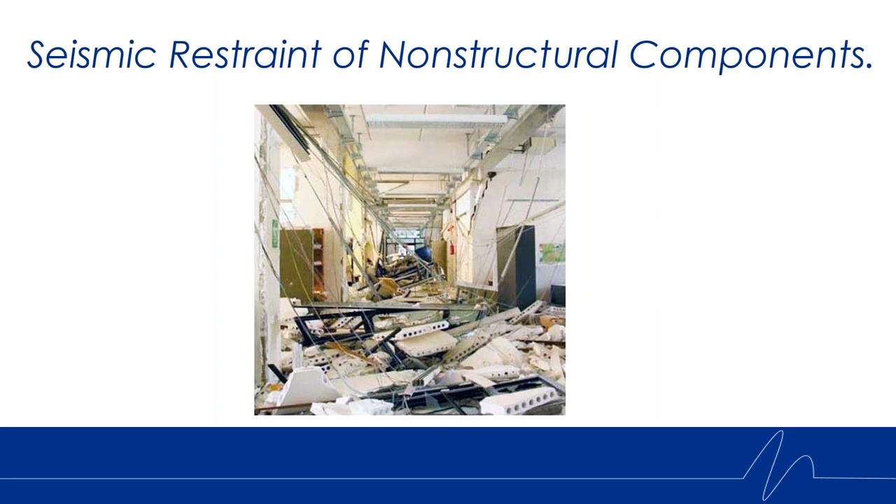So let's talk a little bit today about V.LOCK. V.LOCK is a seismic restraint component that we're going to be offering here at Kinetics Noise Control, and this is in the realm of seismic restraint for non-structural components. Here at Kinetics, our staple of products for seismic restraint have always been led by the Quake Lock. The Quake Lock shown here in the picture is our current seismic restraint device that comes with the cable kits that we currently offer here at Kinetics.

And the Quake Lock is a fantastic product that does as intended. However, the installation of the Quake Lock itself in the field can be sometimes a little lengthy and a little challenging. So in order to properly install a Quake Lock device, you do have to feed the cable through it twice, and then each one of the little adjustment screws does have to be torqued down to a certain torque setting using a torque wrench. So as you can imagine, when you have a long run of pipe or duct, you have a lot of seismic restraints within that run. There's an awful lot of these devices that have to be tightened up.

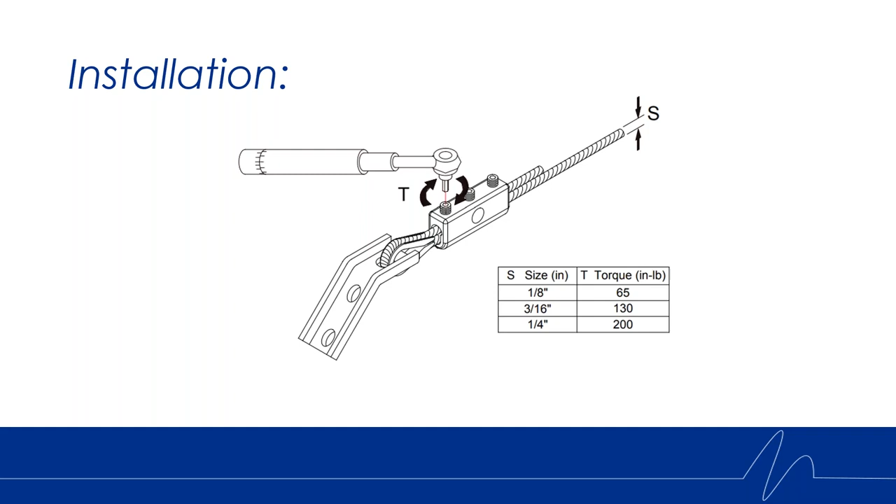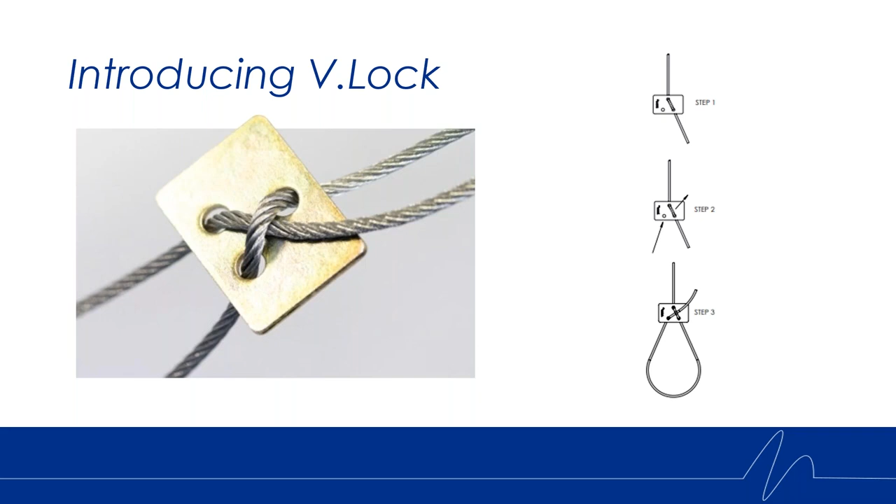So with that in mind, Kinetics is coming out with a product called V.LOCK. The V.LOCK product is essentially a seismic restraint plate that takes 3 extremely easy steps to tighten. So unlike cranking down the adjustment bolts for the Quake Lock, the V.LOCK, as you can see from the rendering, the diagram here, you just feed the cable through the 2 holes around whatever you're attaching it to, and then under the cable again. So that's how the V.LOCK system works, and as you can tell, installation is done in much less time, saving field labor for the contractor.

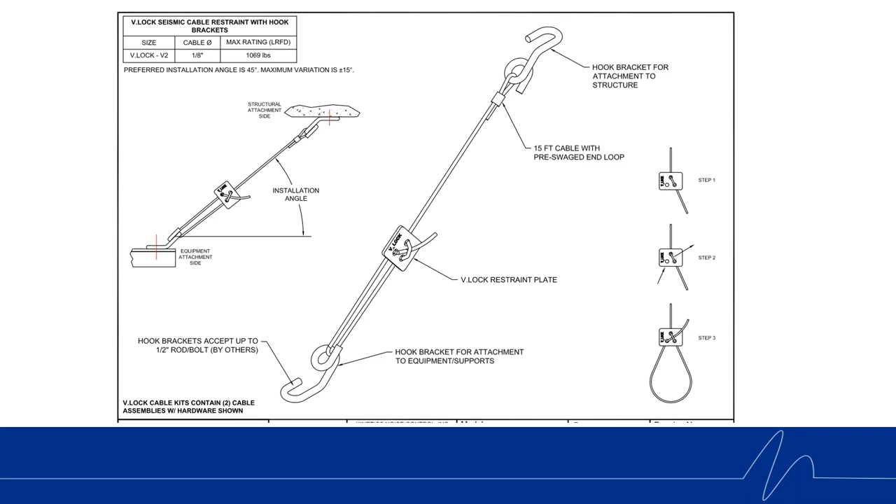So here's a look at our 1/8-inch cable kit. This will come with 15 feet of cable. It will come with 2 hook brackets. I'll show how those work here in a minute. And the V.LOCK plate. The V.LOCK plate will be in line with the cable kit and easily installed. For the 3/16 cable and the 1/4-inch cable, we are going to be offering an angle bracket, which is very similar to our current kit offering that we have with Quake Lock.

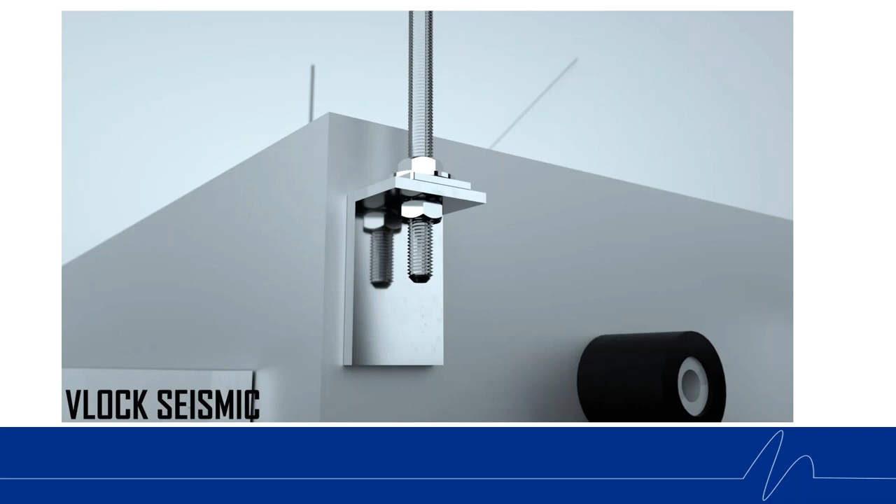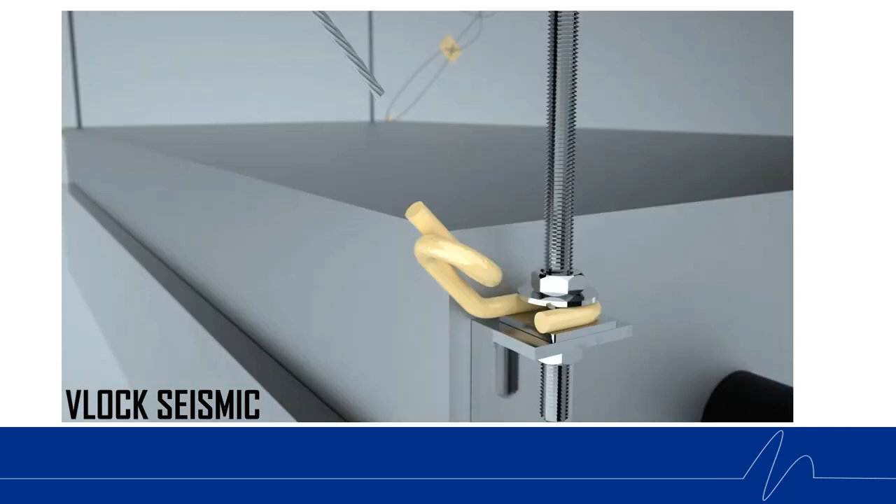So let's take a quick look at how potentially the hook bracket would work and a look at the V.LOCK itself in action. So the hook bracket can be installed on any rod or threaded anchor that's already in place. Slide the hook around the system, and then as you can see, the V.LOCK plate is easily installed in the cable and restraining. So the hook bracket's meant for easy installation as well. And again, the V.LOCK with the 1, 2, 3 system.

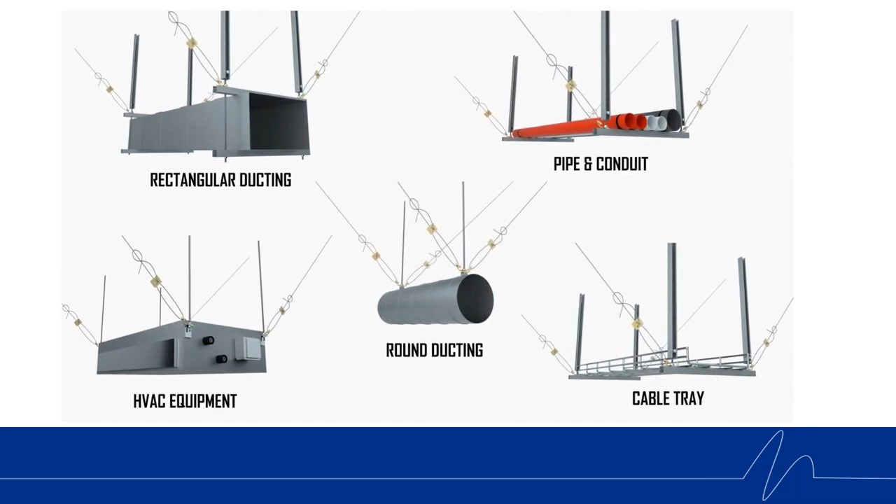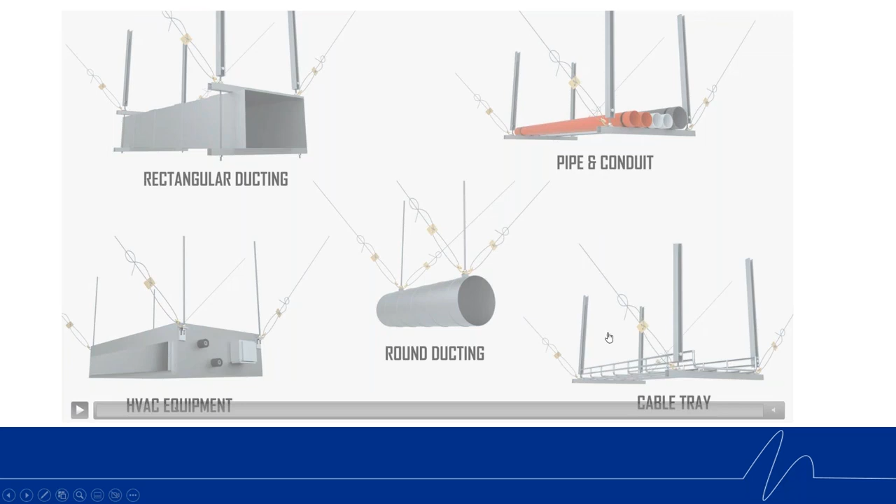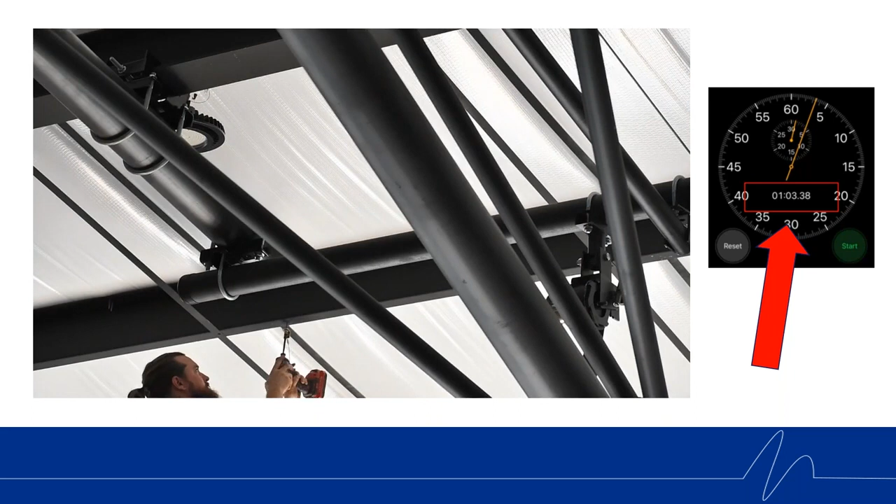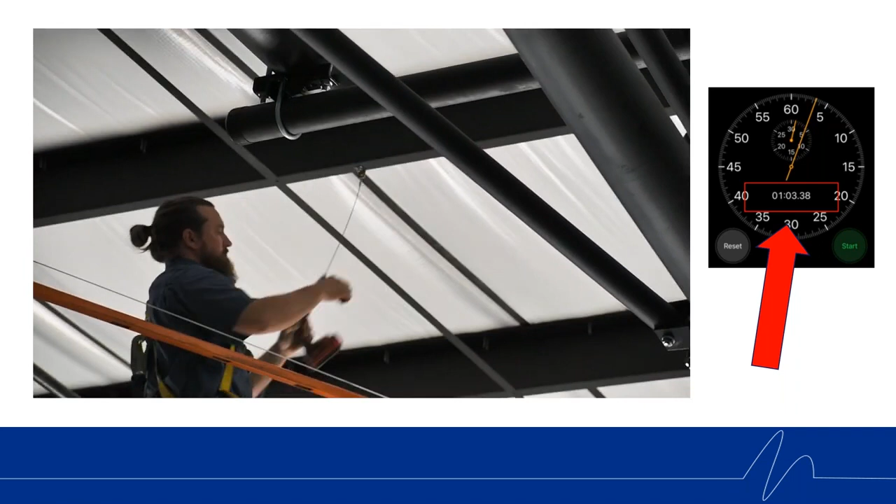So how long does it actually take to install V.LOCK? We recently did a test installation, and it can be used for ducting, rectangular, round duct, pipe, conduit, equipment that's suspended, cable trays, those kind of things. And we recently timed a contractor installing V.LOCK. So here you can see the contractor starting with the actual installation of the anchor part. This is a V.LOCK suspension kit. The contractor's installing the anchor, and he's actually going to be attaching it to that other cable that's spanning the space that's going to be holding a duct sock.

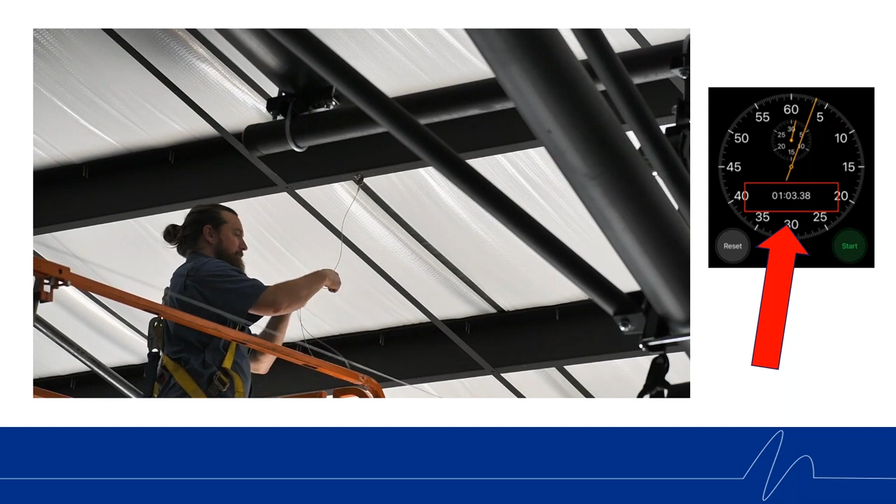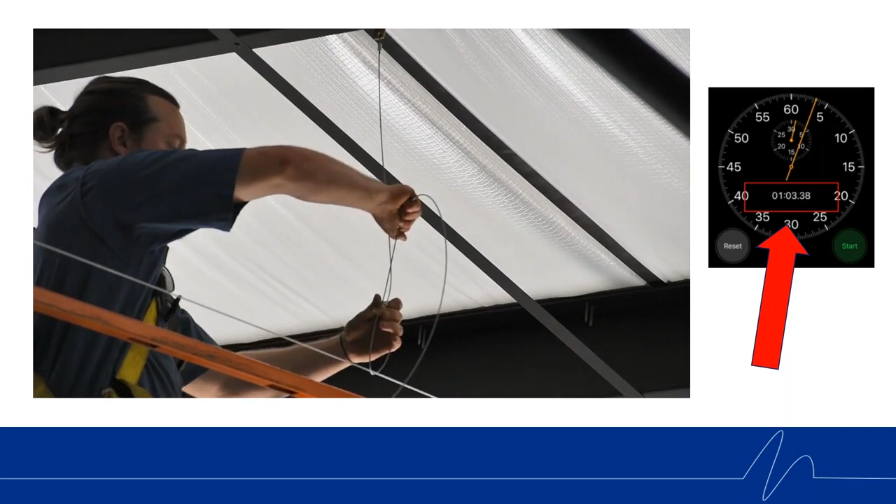So we use this as a great example to see how long it's going to actually take from screwing the V.LOCK into the structure and then sliding the V.LOCK plate up the cable to where it's in position, then taking the rest of the cable below the V.LOCK around whatever it is you're suspending, and then basically making that 1, 2, 3 loop through the V.LOCK. So in this actual installation, this video, the timing is 1 minute and 3 seconds. So compared to our current offering with the Quake Lock, 1 minute and 3 seconds is going to save a lot of time in field labor and really lower the installation costs for seismic restraint for the contractor out in the field.

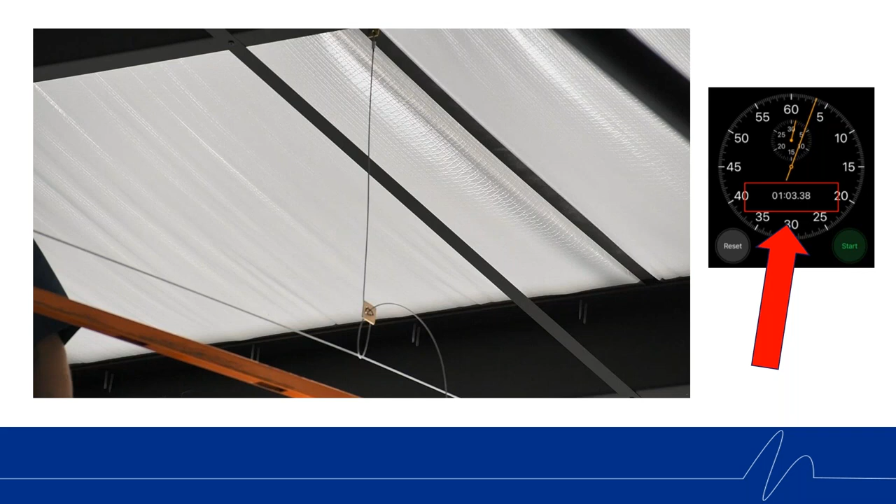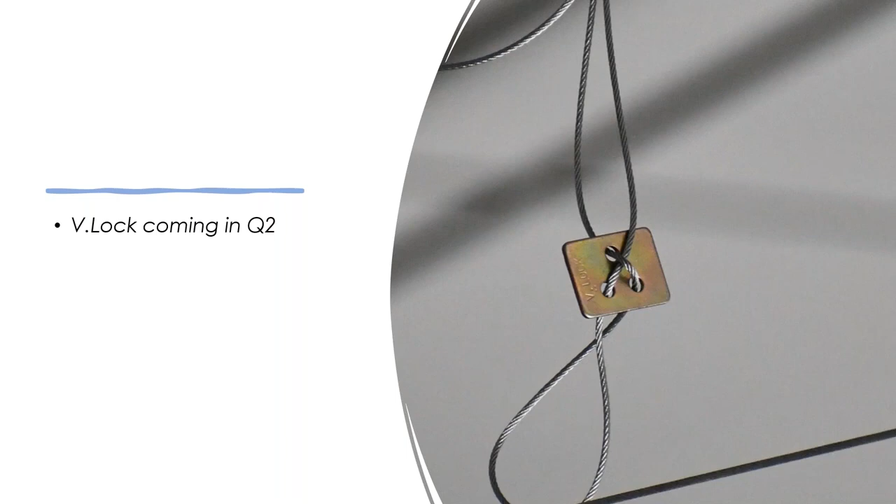So when is it coming? When are we going to have more information? We will start engineering designs around V.LOCK projects here in the next month or two, and product will be available middle to end of next month for shipping. So V.LOCK's here, it's coming. There'll be more information on the website soon, but that's really it. The product is extremely simple to use and easy to install, and that's why it's a real short and simple webinar today.